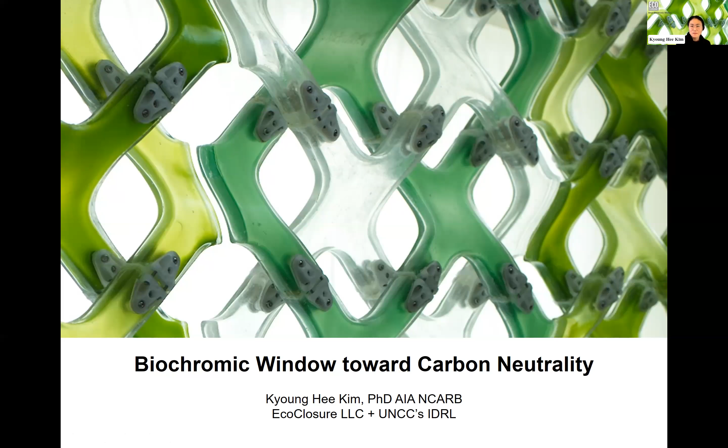We are in the era that we call the Anthropocene, viewed as the period during which human activity has been the dominant influence on climate and the environment. The built environment plays an important role in reducing the impacts and safeguarding the ecosystems and human built environment.

If we keep our business as usual, we will need 2.5 Earths. The issue is that the Earth will outlast us; humans will go extinct, like in the past. So we need to dramatically reduce carbon emissions by 2030 such that we can meet carbon neutrality by 2050.

As population grows, embodied carbon will increase because we need to expand more urbanization and build more buildings. Oftentimes we focus on reducing operational energy, but we have to think about how to also offset the embodied carbons emitted by these construction activities.

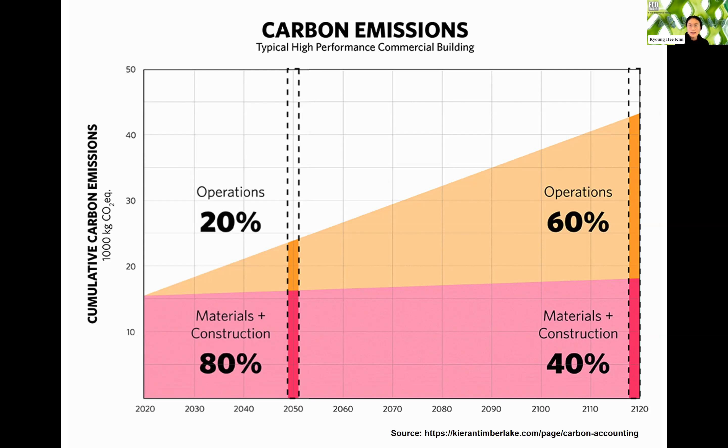I have been working on three design strategies to meet not only sustainability, but also offset the carbon caused by the built environment. One is that we have to put building technology or design in a way that reduces energy consumption. On top of that, renewable energy resources should be used to offset energy consumption from operation, manufacturing, and construction.

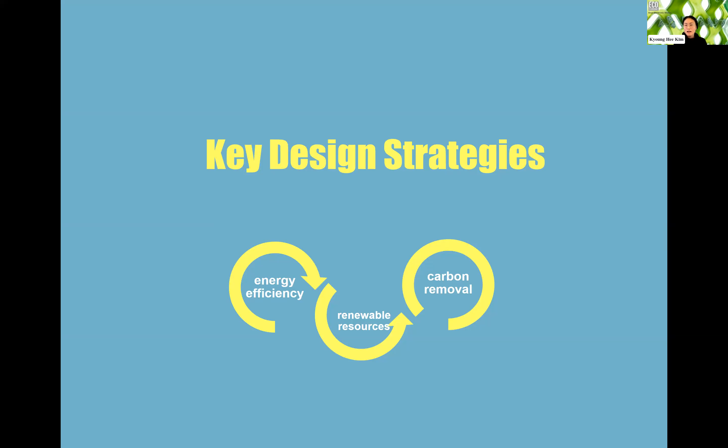Finally, we have to think about how to actively remove carbon. In my experience, both in education and practicing as an architect, we often only focus on energy efficiency of the building and incorporating BIPV systems as an example, but we have to think about how to actively reduce carbon emissions.

Going back to the design strategy of energy efficiency, renewable energy resources, and carbon uptake, we try to minimize energy consumption through regulating solar gain by alternating or manipulating the density of the microalgae. We also want to find ways to reclaim the stored energy within the system for space heating and domestic hot water.

The end product of the microalgae from these systems can turn into avenues that benefit societal needs, such as human feeds, aquatic feeds, animal feeds, fertilizers, biofuels, and soil amendment.

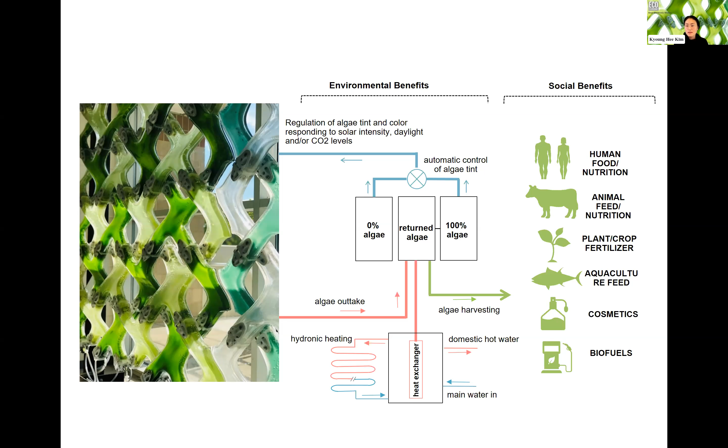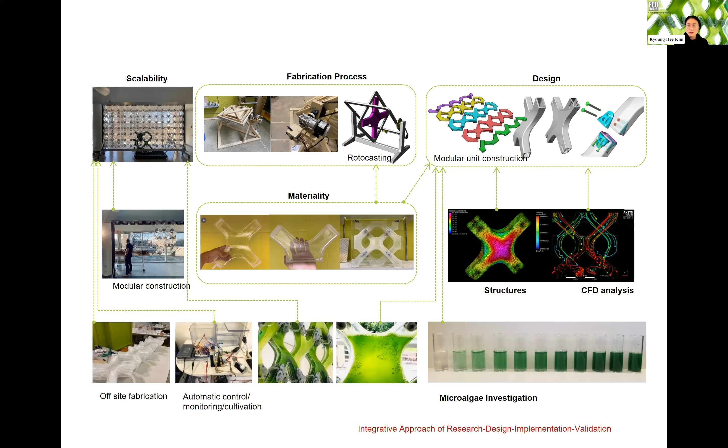This is a quick overview of the way we approach the biochromic window R&D. Starting from the design concept, we figure out ways to make cost-effective and scalable manufacturing techniques. Alongside the design, we also carry out analysis—in this case, structural analysis and computational fluid dynamic analysis—to make sure it is structurally sound and provides the environment for microalgae growth. We also work with biologists and engineers to make this work successful.

This is the modular system of the bioreactor that can turn into different shapes and sizes. Here's a closer view.

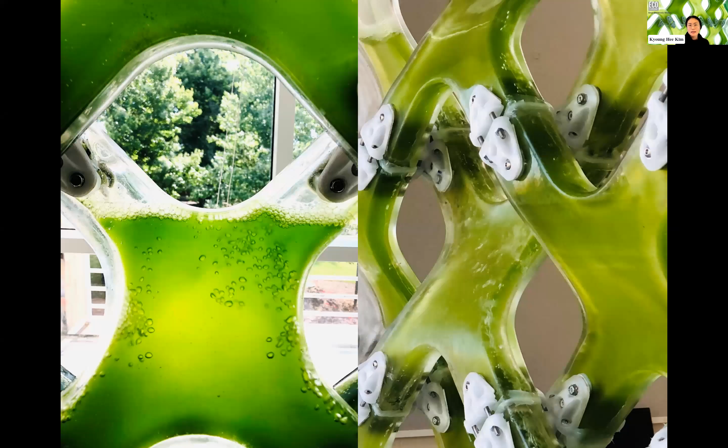So the intake of the air is coming from the bottom, like a fish tank, and then the oxygen is produced through the top of the systems. Young algae is filled from the top, and the grown algae is harvested through the gravity systems to harvest. The system has been installed in the school architecture, and depending on the lighting conditions and different strains, we can create different light quality and spatiality that can impact students' perception.

Another thing we've been working on is to actively offset the carbon dioxide. Currently, the USA produces 5 gigatons of carbon dioxide, and we did calculations on how much coverage is required by our system to offset the entire annual carbon emissions. We need 100 parking lots of superstores to offset the carbon emissions.

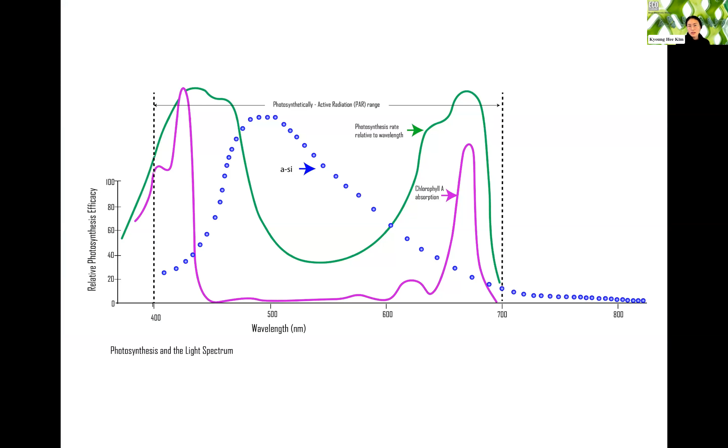Currently, we are working on EV charging stations that can be installed on those open parking lot spaces, integrating with photovoltaic systems that can complement the solar spectrum. For example, green and purple in the solar spectrum are used by the microalgae, and the blue dots are utilized by the amorphous photovoltaic systems you can see here.

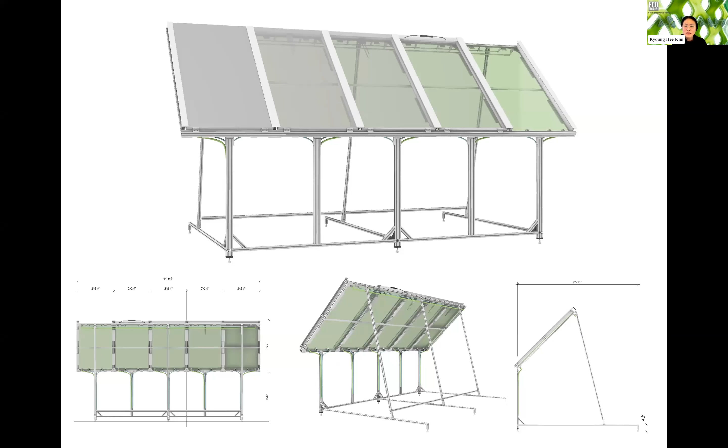So we are currently in the process of installing them in the school again to do the proof of concept, and hopefully we can have some initial data that can justify our hypothesis.

I'd like to introduce a recent book I published, Design and Engineering Principles for the Microalgae Building Enclosures. I have also been practicing as a building facade consultant at Front Inc. in New York City for a decade, so I am very passionate about how building services can play a role in environmental and social responsibilities.

There are many building examples around the world that are either actualized or available as speculative projects. This is just a short excerpt from my book, which covers interventions at the infrastructure level, urban level, and building and products level.

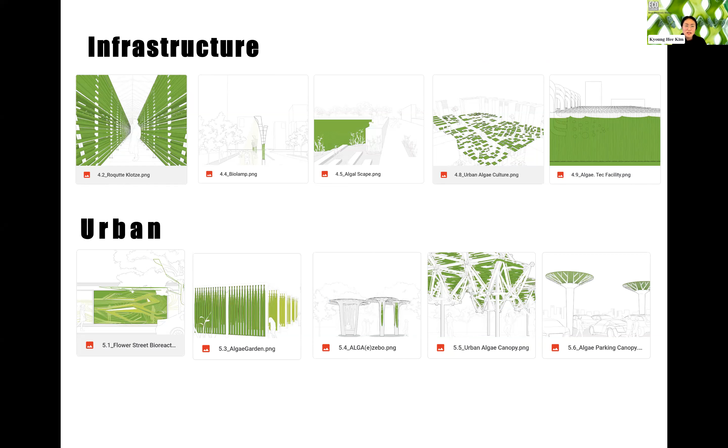For example, at the infrastructure level, we could use them as a food farm to feed humans, and also turn building surfaces to offset carbon dioxide. We can also integrate them as a parking canopy or bus shelter as an urban technique. The building surfaces play an important role for integrating microalgae systems because algae rely on the solar spectrum to grow.

So these are the primary locations, and we are also looking into products, how we can keep these microalgae permanently such that they do not turn into carbon dioxide. If we don't treat them in a proper way, they decay and then turn into carbon dioxide.

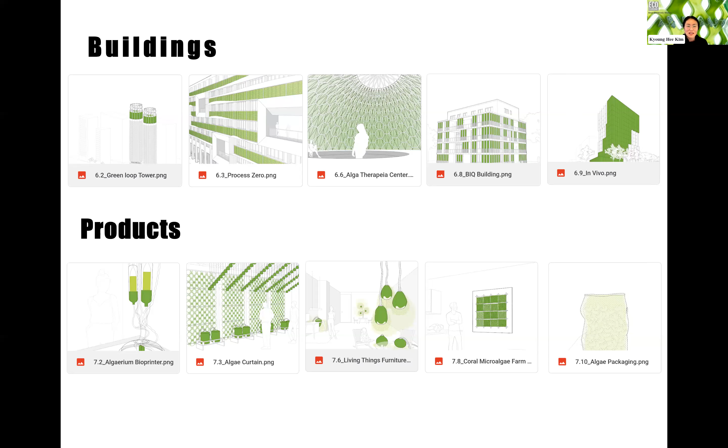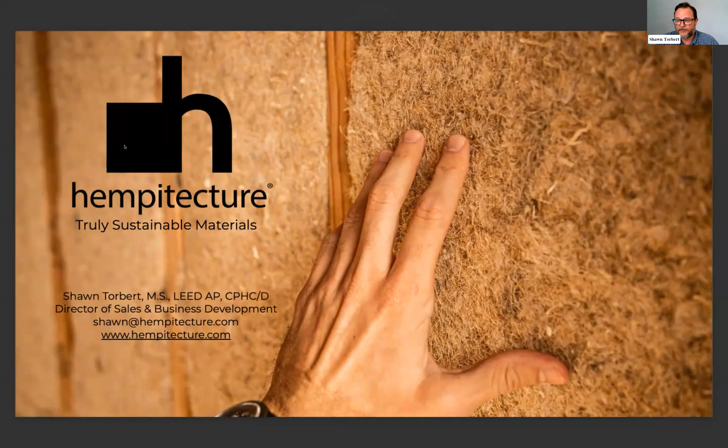Hempitecture is a new company, only about 4 years old, based out of Idaho. I'm based at the northern part of the Jersey Shore near Sandy Hook and Asbury Park, in the shadow of New York City. I've been involved with the passive house community, focusing on reducing carbon emissions from an operational standpoint over the last 15 years, and now really focusing on reducing embodied carbon in the built environment.

As Dr. Kim so wonderfully teed up, as far as carbon emissions, we're going to cover some of how that impacts insulation and what we're doing here at Hempitecture.

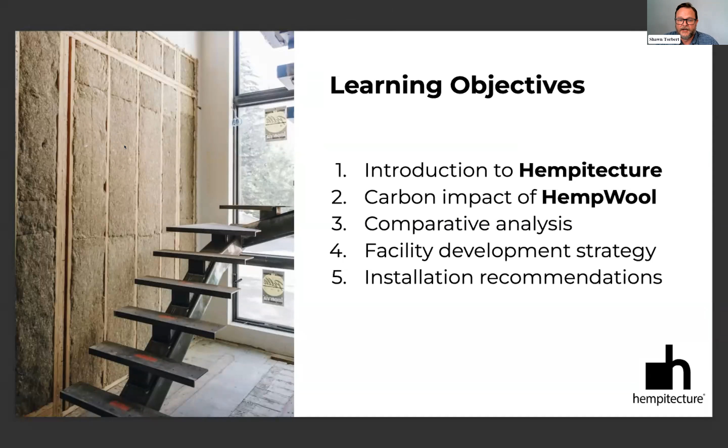As Ed Mazria laid out for Architecture 2030, we're really in a tough spot when it comes to meeting the Paris Accord and reducing carbon emissions. About 40% of emissions come from the built environment in the United States, but in cities that can be as high as 70 to 75%. Over the life of a building, operational energy and carbon emissions have a large impact, but in the short term, over the next decade or two, embodied carbon has an oversized impact. So for new construction, reducing embodied carbon in building materials is essential if we're going to meet the climate and greenhouse gas reduction goals.

Hempitecture is the first company in the United States since the legalization of industrial hemp in 2018 to use North American grown hemp fiber as an insulation material. Up to this point we've been importing from our partners in Canada, but we just completed manufacturing at our first factory in Twin Falls, Idaho. Building with locally grown bio-based fibers and manufacturing locally creates local jobs, both in the building sector and manufacturing, as well as agriculture jobs as a cash crop. It also shortens supply chains—during COVID, supply chain issues for building materials were a nightmare—so we'll be able to do all of this locally.

We first started about 7 years ago as an idea, trying to realize hempcrete building systems in the United States. Hempcrete is a natural building technique widely used in Europe, where you add a cement-type product to hemp fibers, similar to a rammed earth system, then finish it with old world Italian lime plaster. However, in the United States, we don't really build that way, so now our main focus is on hemp batt insulation, which is a one-to-one replacement for traditional batt insulation.

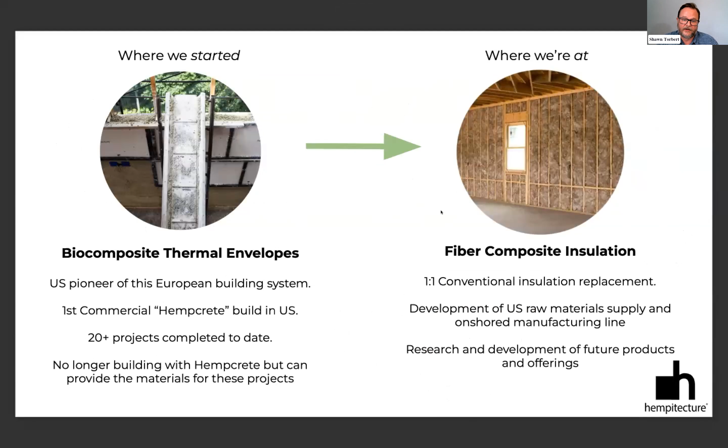So why hemp? As I mentioned, it's a weed, so there's high yield per acre. It doesn't require fertilizers and uses lower water than other crops. It's inexpensive and abundant, regenerates the soil, and we can use the entire plant for different products—the flower goes to CBD production, the seeds go for hemp oil and health foods, and we use the stalk to create the fibers.

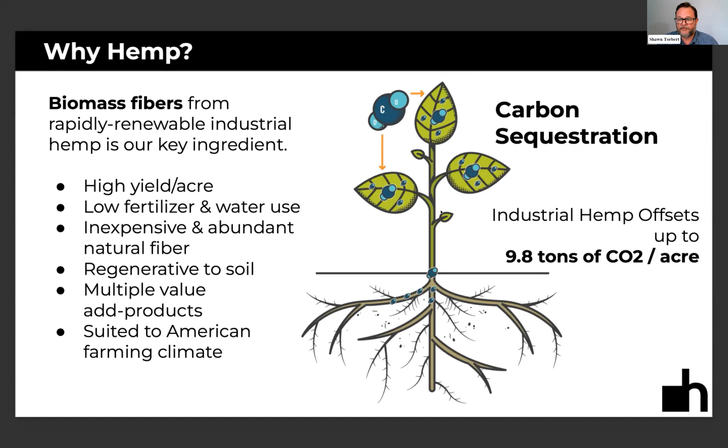Estimates are that an acre of hemp can offset or sequester approximately 10 tons of CO2, so each acre of hemp is the equivalent of taking 2 automobiles off the road.

Oh, I forgot to mention, because it's a weed, it can basically grow anywhere in the United States. So again, our primary product is hemp wool insulation, a one-to-one replacement for traditional insulation products like fiberglass batt or mineral wool insulation.

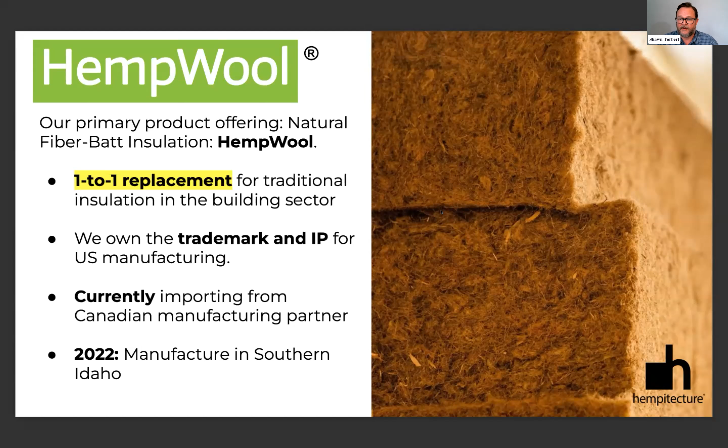We own the trademark and IP, and we've been importing from Canada to supply projects in the US for the last 4 years. We just finished construction of our factory in Idaho, and we'll be testing our first runs of American grown and American manufactured hemp any day, which we're very excited about.

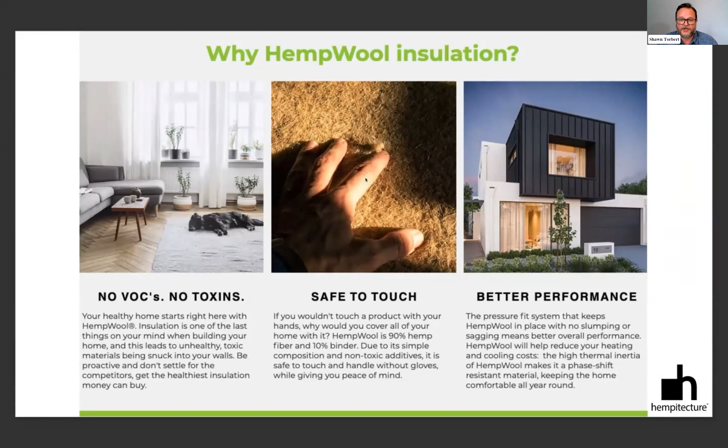As a material, there are no VOCs, no toxins. It's non-allergenic and safe to touch, so you won't get the itch you get from fiberglass or the abrasiveness of mineral wool. It also has better performance from its dimensional stability and the way it's friction fit into interior stud cavities or partition walls for acoustical insulation.

Looking at the embodied carbon of insulation, there's hemp fiber down on the bottom there. It has a negative embodied carbon footprint, and you can see how that compares to other types of insulation materials.

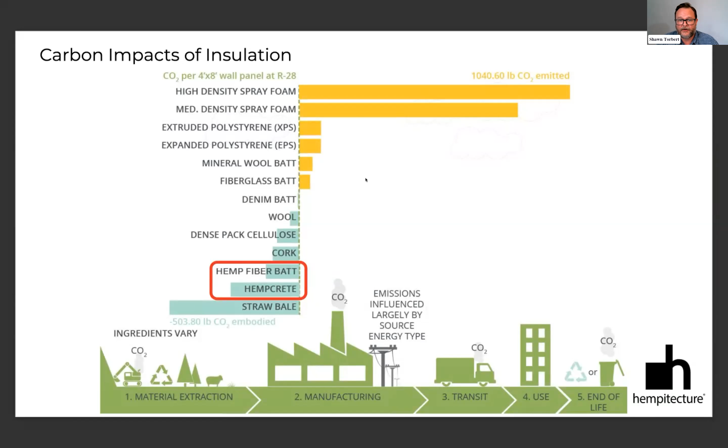Here's looking at an R-13 batt, like a traditional 2x4 type of assembly or thickness of insulation. The key thing to look at here is, as driven by the energy codes, or if you're going for net zero energy ready, living building challenge, or passive house, these insulation thicknesses are going to be 10, 12, sometimes even 15 inches thick.

So the positive numbers there, like for mineral wool, for example 608, you can imagine if that was a 6-inch stud, that would be a third higher. If you go even thicker, that moves to the right and has a larger embodied carbon footprint, while bio-based materials that sequester carbon move to the left and have a larger impact reducing that embodied carbon impact.

This is important because I'm not sure if everybody knows, but New York City just had an executive order requiring embodied carbon analysis for all city-owned buildings, really focusing on the concrete and steel industry, which are heavy industry polluters for manufacturing those products.

There's also a full building life cycle analysis requirement. So where projects are now required to account for and reduce embodied carbon, using bio-based materials like hemp wool can help offset the heavy industry materials required for large scale construction like we have in the cities.

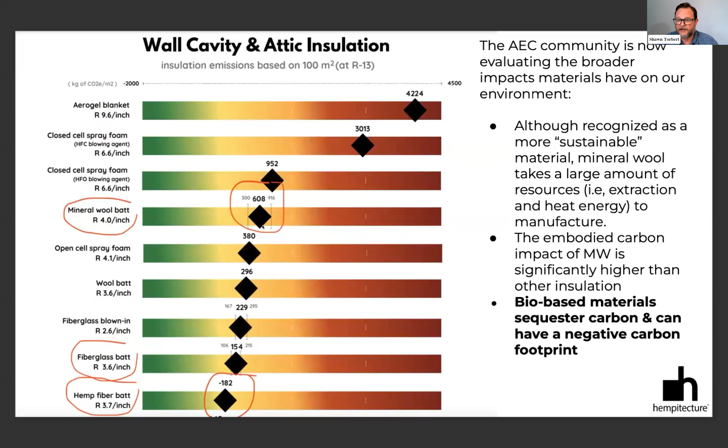Sizes are standard: 2-inch, 3.5-inch, 5.5-inch, 7.5-inch for wood frame construction, either 16-inch or 24-inch widths if you're doing advanced framing techniques, and they all come in 4-foot lengths.

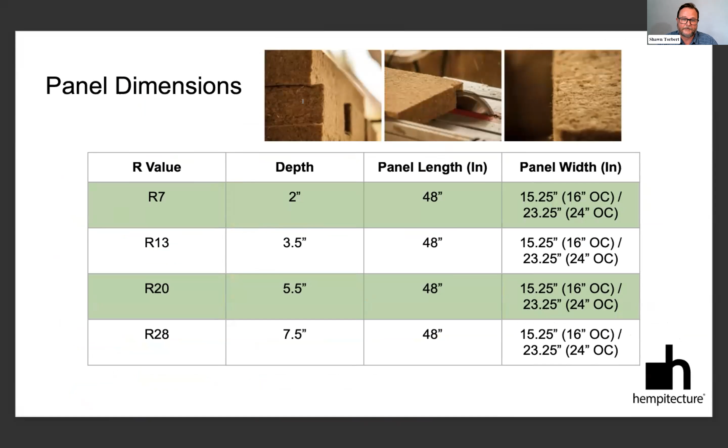And we'll see if this video works. If not, installing hemp wool insulation is very easy. Essentially, it's friction fit—you take the hemp wool out of the bag, stuff it in, and pat it into place, making sure it fills the cavity completely.

It's not overly compressed. The adjacent panel above it, starting at the bottom and working up, is friction fit into place so it butt joins against the panel or batt below it, making sure there are no gaps, so you have a nice monolithic continuous insulation in that stud cavity.

Here are some fresh pictures from just last week of our first facility in Idaho. As I mentioned, we're very, very excited about this. It's been a lot of work, and thanks to the support of all of our funders.

We were crowdfunded to get to this point. We've grown organically and really bootstrapped ourselves to this point, and the goal is to get our first test runs going in the coming weeks.

Once we fine tune our recipe based on the hemp grown in Montana and the genetics of the hemp fibers grown here in the United States—which we are currently working with Oak Ridge National Laboratories to dial in for the US market—we'll be able to repeat this in any community that grows industrial hemp in the United States.

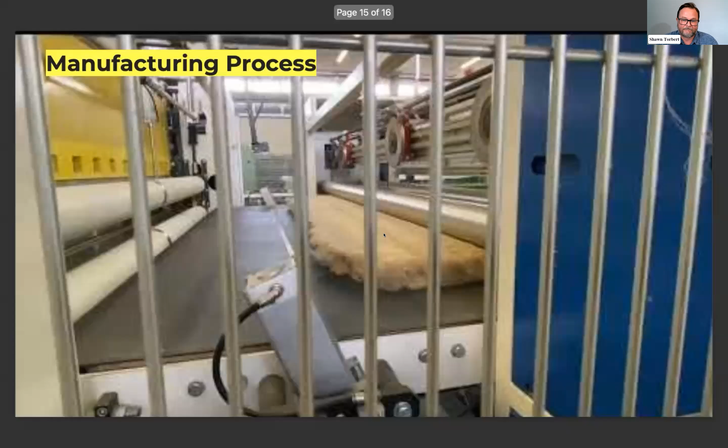So here's a video that's probably not going to play, but this was from our prototype manufacturing. Essentially, the fibers are layered and go through a compression process. We add about 10% textile polyester as the binder, like you have in pretty much all your clothes. Then we get these batts cut and then bagged.

Next slide. And thank you.

Thanks, Shawn—you're on mute, Bo. There we go. Thank you. Thank you, Shawn, that was awesome. I know a few people entered some questions during your talk, so we'll get to those at the end. And I'm going to quickly introduce our next guest.

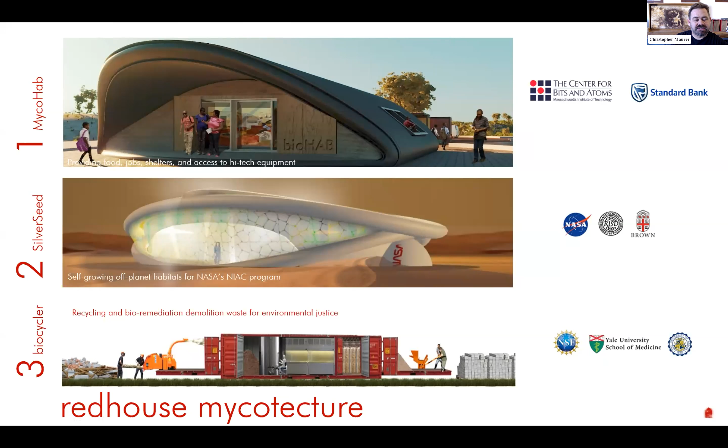They're inert biologically. But the one I'm going to talk about mostly today is the first one there, MycoHab, where we say we're providing food, jobs, shelter, and access to high-tech equipment. I'll unpack that a little bit. This is a project in Namibia, in the southwestern part of Africa. What you see in the background of the video is fungal mycelium growing. The reason we're looking at that as a potential building source is because it grows so quickly. Yes, hemp grows really quickly, but mycelium is another organism that you can grow tons of material in days if you have the right infrastructure for doing that. Not only that, we can provide food and other things in the same process.

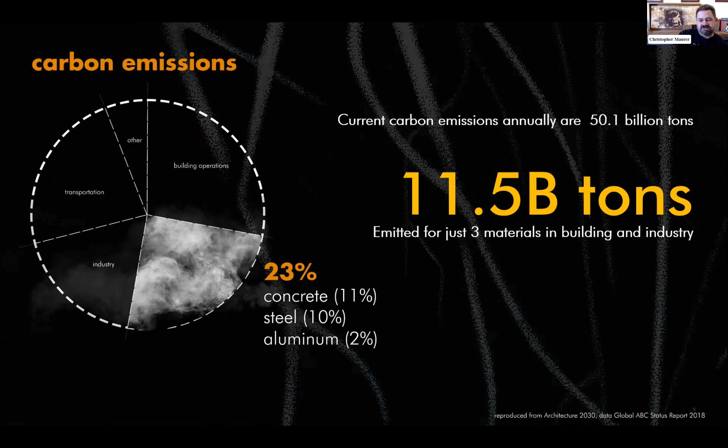So I want to first start with some numbers. This crowd seems to know a lot about this, but the embodied carbon footprint is a huge aspect we need to tackle. If we want to get to carbon neutral by 2050, there are 200 billion tons of building materials made every year. Three of those materials, concrete, steel, and aluminum, equate to about 23% of the carbon emissions from materials. Most of that, in fact 84%, is just in raw extraction of the material - mining things, processing, turning them into new materials.

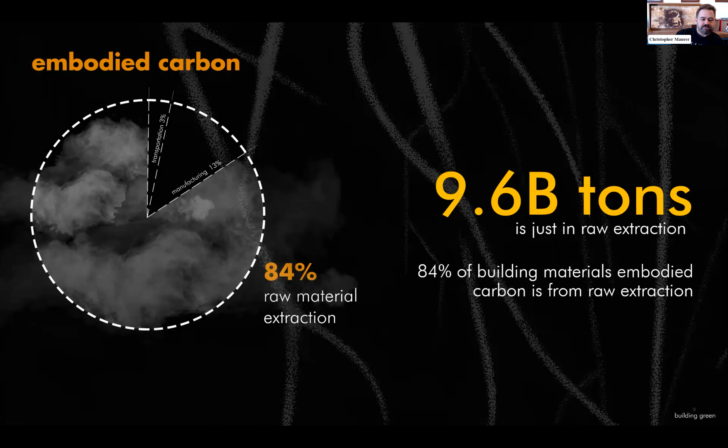And so this is where the circular economy, or using circular resources, recycling and renewing materials, can be super advantageous, because we can decrease that whole raw extraction part of that.

There are about 230 billion square meters of buildings that will be built by 2060. So imagine every building in the world, and then double that—that's how many buildings we're going to make by 2060, 2.5 trillion square feet. So one of the big things I want to translate here: buildings are big. That's a very important takeaway.

There are 3 places I think we can store carbon efficiently. Oceans are our biggest resource—we can store carbon there. The ground is our second biggest resource, land. And then our third one, the ones that humans actually build, are buildings and infrastructure. So that's our third biggest opportunity to actually take carbon from the atmosphere and store it somewhere.

So buildings are big. How can we do that? We can use plant-based materials, because plants actually draw down carbon through their life cycle. And if you're able to keep them from re-emitting that into the atmosphere, either by burning, digesting, or just letting decay—say in landfills—then that carbon will be locked away. Whereas normally, part of the carbon cycle is recycling that back into the atmosphere. That's normally a good thing if we weren't emitting so much carbon—it would contribute to a healthy carbon cycle.

But another way to do this is to take that carbon and store it somewhere, and buildings are a great place to do that. The way you calculate how much storage you can do in a given plant-based material: take the organic carbon and multiply that by 3.67. This is because carbon dioxide molecules, which are really big, get converted into carbon atoms that are in different molecules, and the carbon dioxide equivalent of that is 3.67.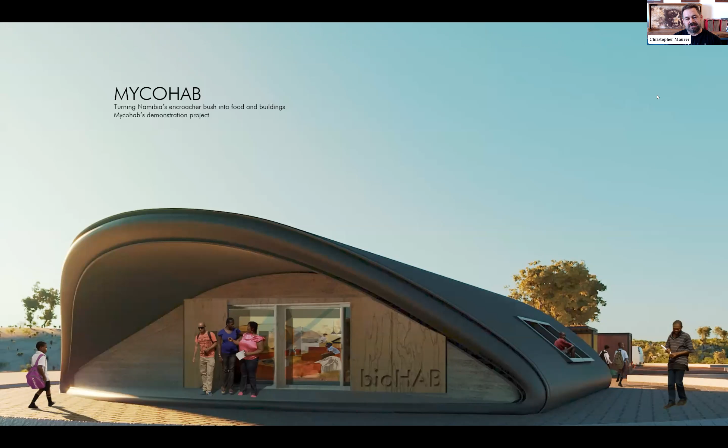That brings us to Mycohab. This is a project we're working on in Africa. There are different locations where we've started this, but our main one is in Windhoek, Namibia, where we're turning Namibia's encroacher bush into food and building materials.

But they figure there's at least 330 million tons of material that can be sustainably harvested every 15 years and can go to value-added goods. Most of the time, this fuels pellets and charcoal and things that are burned, which re-emits that into the environment. We call that carbon neutral because it's at least offsetting petrochemicals and fossil fuels—it's drawing down that carbon, then releasing it, whereas fossil fuels are basically just releasing them. But there may be a better way—you could turn this into building materials, and even food, in the example of what we're doing here.

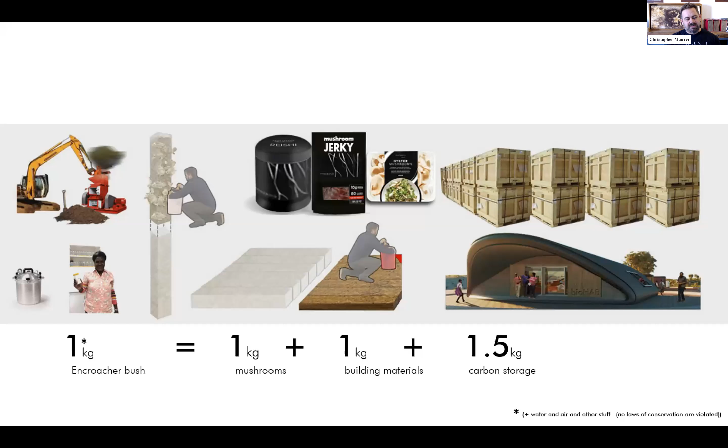I work with a physicist at MIT, and I assure you there's no laws of conservation being violated here. We are adding water, we are adding air, we are adding all kinds of free resources to this equation that makes it all play out physically. But basically the takeaway is 1 kilogram of waste material turns into all these beneficial things.

This is our humble facility in Windhoek, Namibia, where we're growing the mushrooms in shipping containers and actually pressing them in these small outpost type designs. We're looking at packaging this as something deployable to other locations, something we call Mycohab in a box, where we can ship this to different locations and enable small scale farmers to set up a farming facility as well as a building material manufacturing facility.

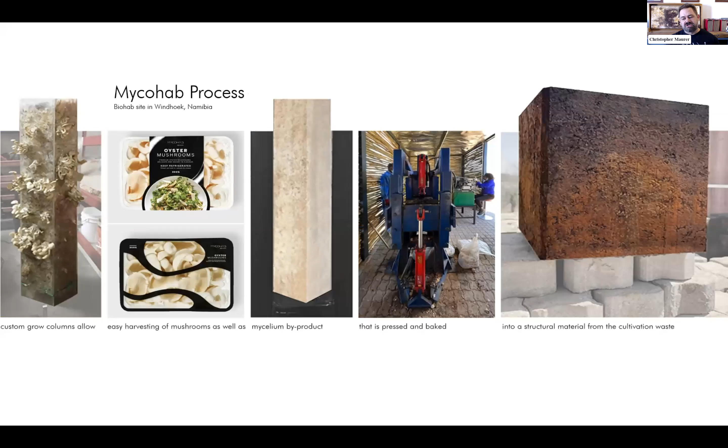Here the process is shown up close again, where the custom grow columns allow for easy harvesting of the mushrooms as well as the mycelium byproduct, and then that's pressed and baked into a structural material from cultivation waste. Here is one of the funnest tests we've done, though very unscientific, about the strength of the material compared to a concrete block.

The bending strength is much better. The insulation value is much better. And then obviously when you compare carbon and food production and all of those things, concrete doesn't even stand a chance.

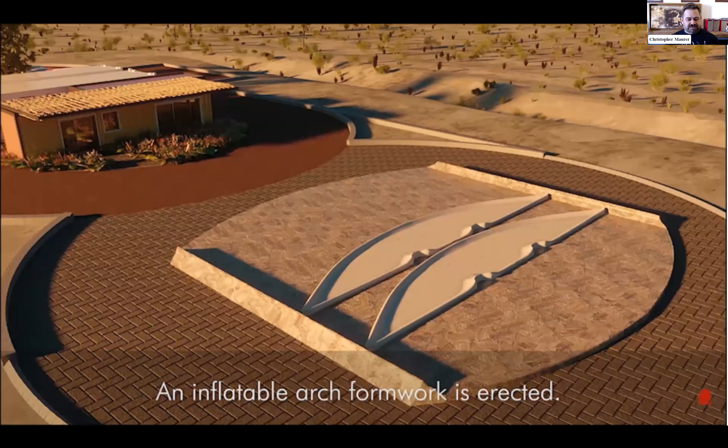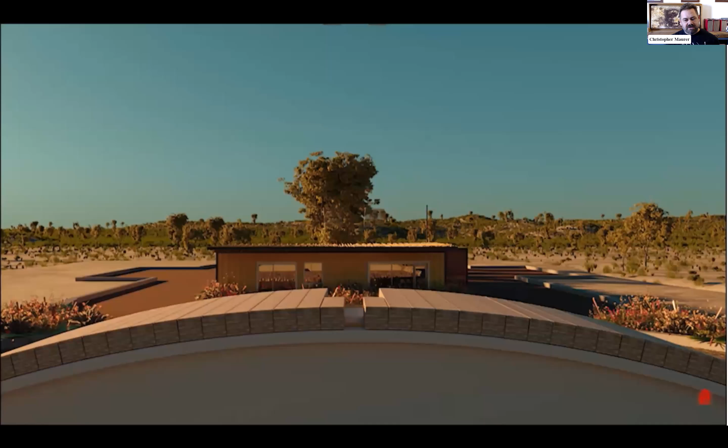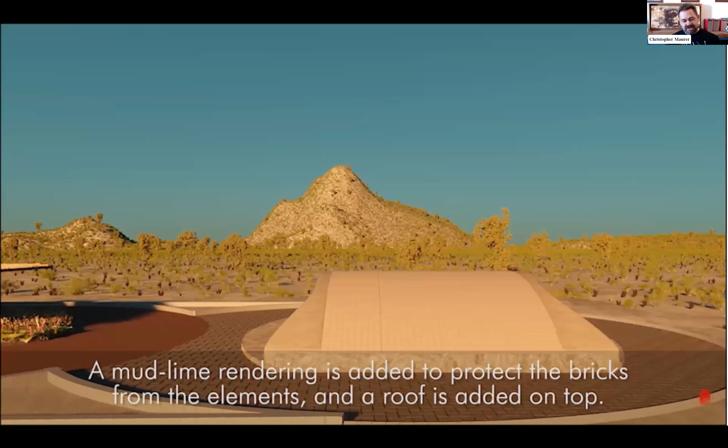So the biohab construction works like this. We have different formworks. We've experimented with inflatable formworks, and this kind of came from our work with NASA, where we could have inflatables reused over and over. We're now using more traditional formwork - it's a little bit safer to use. We build arches, move the formwork, build another arch, and you could theoretically have a building that's miles long when you continue to add arch to arch.

But then it's covered up with a metal roof that's either recyclable or reusable, and the building material protected underneath, the myco material, is at the end of the day compostable if you were to remove this protective layer.

Here are some photographs from on site. We continue to test the material and the assemblies we're making. We build them up, wreck them down, and basically try to see what they can take. We're in the process of building our first prototype that we're actually going to leave up.

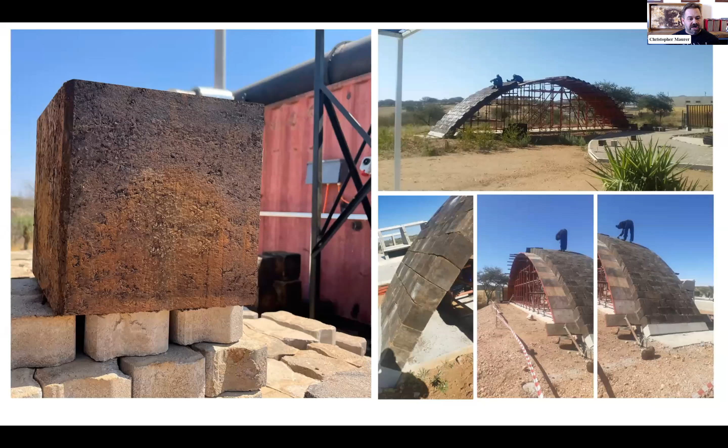We call this boundless growth. The reason being, when your byproducts are things like food and housing and ecology, you can see how proliferating this would have a positive effect, whereas most materials are carbon emitters. Mycohab uses circular resources and regenerative biofabrication to provide food security, bolster water security, regenerate wildlife ecologies, provide low-cost shelter, and store carbon.

And so a lot of times we say these mushrooms are building homes, and we're very clear to say we aren't building homes of mushrooms. The mushrooms are harvested, they go to market, people eat them. I would never build anything out of food itself, because food should be food. But for every pound of mushroom we sell, that equates to 1 pound of building materials that go toward humanitarian housing in Africa.

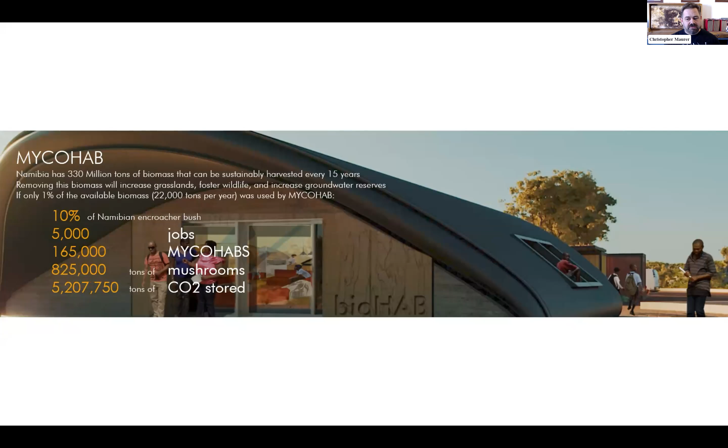With just 1% of the encroacher bush, we could do as many as 16,000 MycoHabs. With 10% of the encroacher bush, we could do as many as 165,000 MycoHabs, and that would be enough to house the 500,000, or nearly a quarter of the population in Namibia, that are housing insecure, currently living in shacks, that could be living in formal settlements through this process.

It's a partnership with Standard Bank, Africa's largest bank, MIT Center for Bits and Atoms, and my company Redhouse. We've now started a company called MycoHab, based in Mauritius and working throughout the world. Last slide, I'll leave you with my email address if anyone would like to talk further about this. I'd love to hear from you. Thanks.

All right, awesome. Thank you so much, Chris. Thank you to everyone, that was a really wonderful discussion. It's really cool to see how you've all worked on things that are different but related.

So with that, I know we've had a few questions already posted in the Q&A. Some questions for Hempitecture - can you see these on your end, Shawn, or would you like me to read them aloud? There's a few questions. I got the Q&A open, so just start at the top. Yeah, you can start with any of those you'd like to answer. Also, if any of the panelists have questions for each other, that could be interesting to hear about what your presentation sparked for each other. So feel free to ask each other something as well.

Great, okay, so the first question looks like it's from Marisol Foreman. Is hemp wool fire resistant? So in its natural form, and the one that we've been importing from Canada for the last 4 years, it's Class C fire rated. The US produced version we just had tested at Intertek - we add a bio-based flame retardant to it, so no borates, no chemicals, it's bio-based, and we got Class A fire rating from Intertek. So as we start US production, it is Class A fire rated.